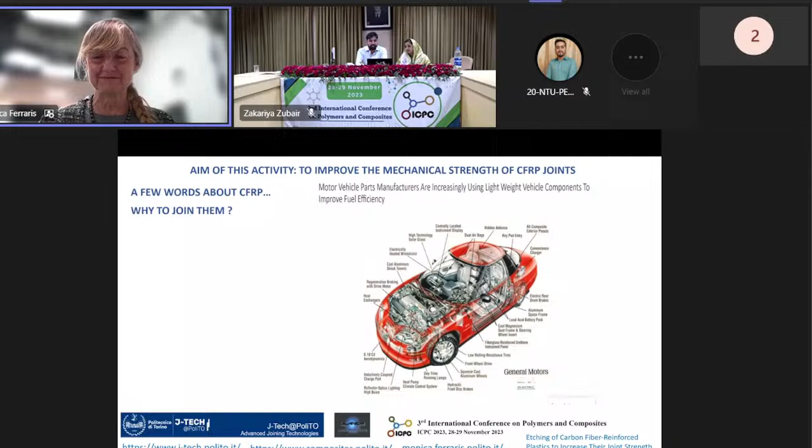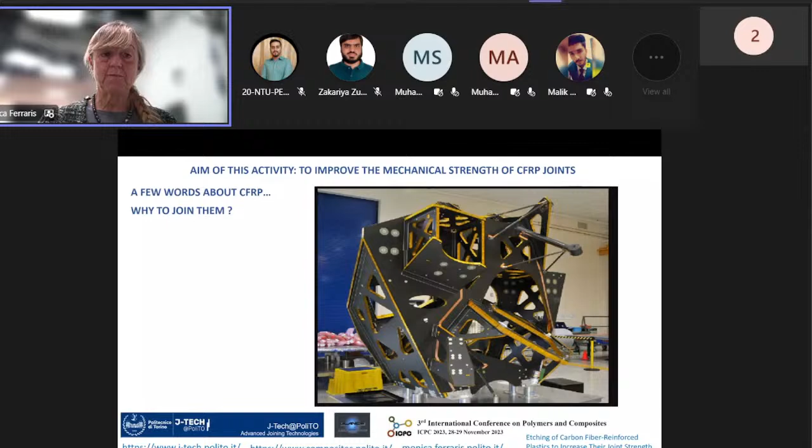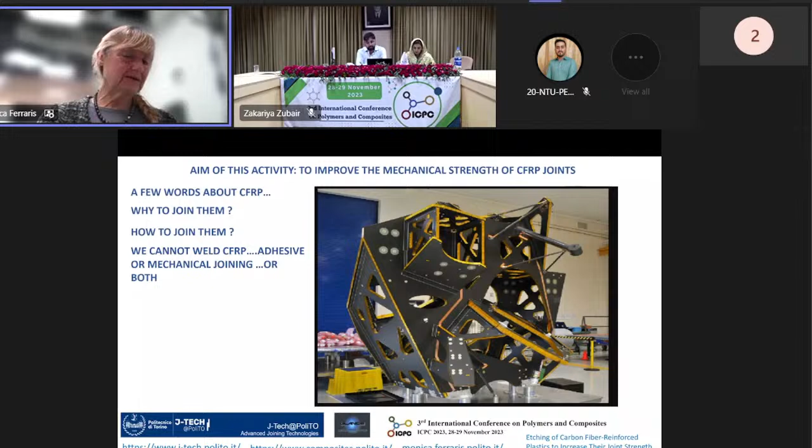So how to join them? For sure, we cannot build monolithically. So we have to take CFRP, put them together to themselves or to other materials, metals, and then we have to join them. Since we cannot weld CFRP, adhesive or mechanical joints or both are the most interesting options. You can see there are some adhesive joints, maybe reinforced by an additional structure, or a traditional metallic mechanical joint. But where is the problem?

Weight increase and cost. So in order to avoid both of them and have a reliable joining strength, we patented a method to etch a thin layer of the matrix without affecting the fibers, in order to have some sort of a composite joint.

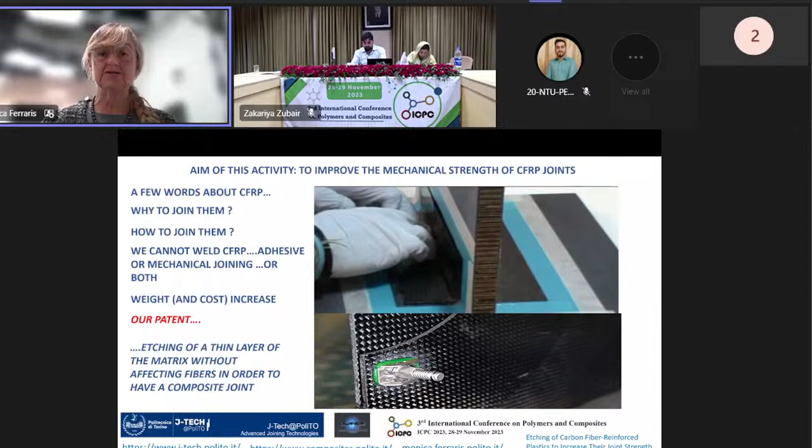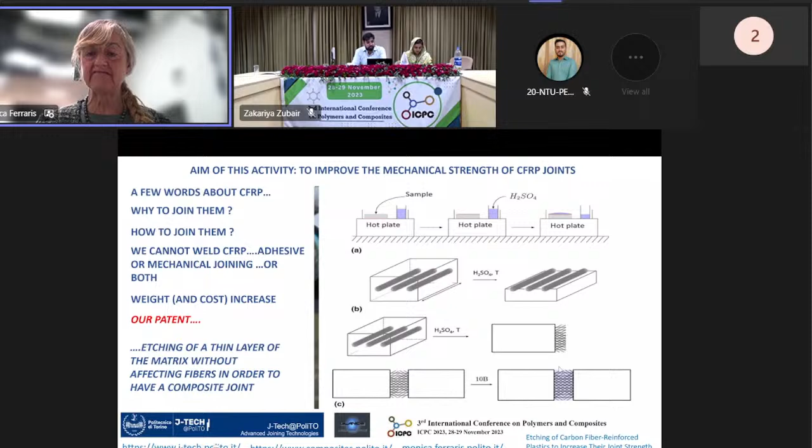So I'll show you a very quick drawing about how we work. This is our sample, the CFRP. Then there is an acidic etching, for instance by sulfuric acid. The aim is to expose fibers without destroying them. If you do that on the other side, you can expose fibers on both sides, and then you can infiltrate your adhesive, and you end up with a composite joint.

This is the aim. This is the lap shear strength of two CFRP jointed together, non-etched, and then with different kinds of etching. This process is very sensitive to temperature and time of etching, of course, but if it works, you can double the lap shear strength, so you can go quite high in numbers.

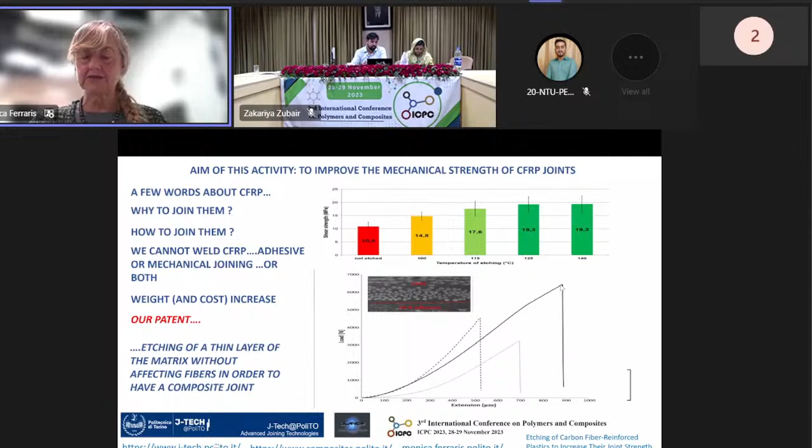And why that? Because you have the CFRP and then the adhesive, but actually you have fibers, and the adhesive infiltrates the fibers, so you have sort of a composite joint. And if you give a look here, the shape of this curve is a brittle fracture. You have a sort of composite failure also for the joint, so it works. It worked, but when you change composite, the etching process is critical.

By the way, all these results are unpublished, and are the subject of another PhD study from Alessandro Benelli, a colleague of mine at Politecnico di Torino, who continued Kashif's activity.

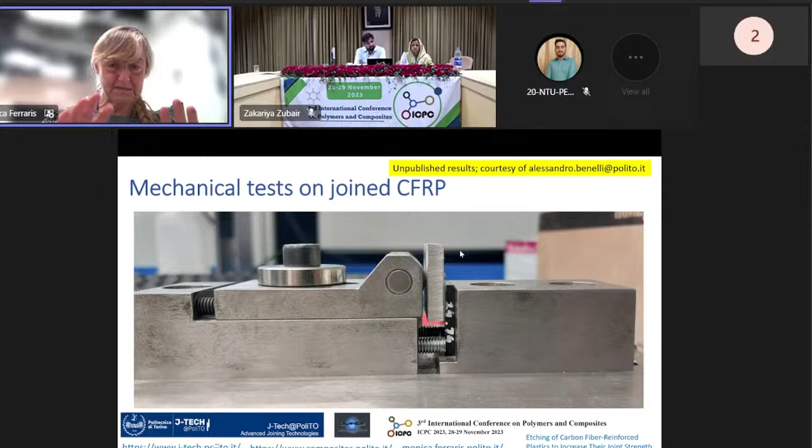Again, this is not pure shear. We are perfectly aware that there are some stress concentrations here and there, but it is at least one way, a simple way to test the behavior of many different etchings. We are now thinking about moving to tensile, but even with tensile, we have some issues with bending. So at the moment, we stay on lap shear, offset lap shear in compression.

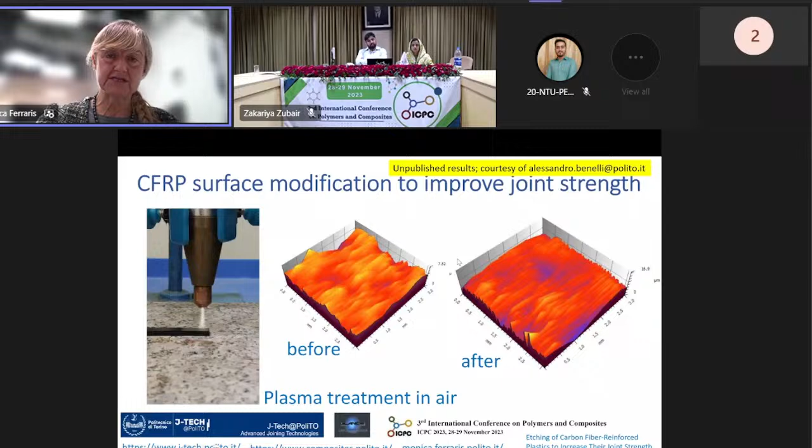So another activity we are doing in parallel is surface modification of CFRP in order to improve the joint strength. Not just acidic etching, but we try to work with plasma treatment in air right now, plus in the future with different gases. And, well, as you know pretty well, it is a way to clean the surface, not just to clean, but a way to activate the surface and to improve the joint strength. We have just started this activity on that.

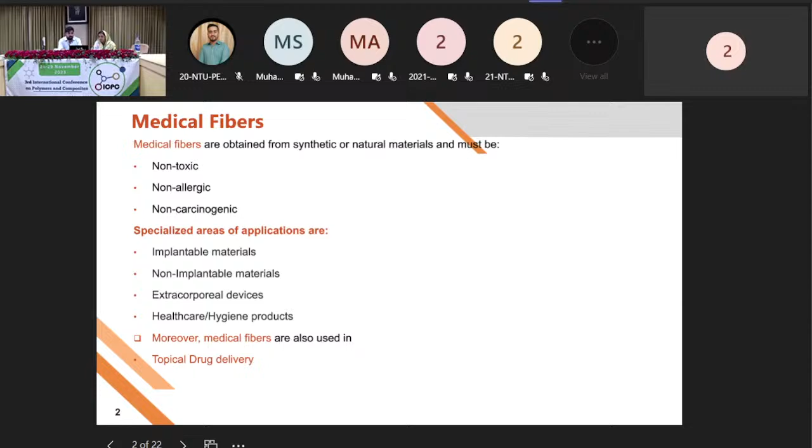So regarding the medical fibers, their specialized applications include implantable materials, non-implantable materials, extracorporeal devices, healthcare and hygiene products. In addition, they are also used in topical drug delivery systems, which is a medication device used to administer drug to the body through the skin. In this process, we use different sorts of formulations, which include cream, gel, ointment, paste, lotion, powder, etc., which we are actually using in our daily life.

Apart from that, there are some other forms like fabric form, which can be a non-woven structure or a proper fabric structure which has drug incorporated on such carriers, and the drug can be penetrated through the skin from these reservoirs.

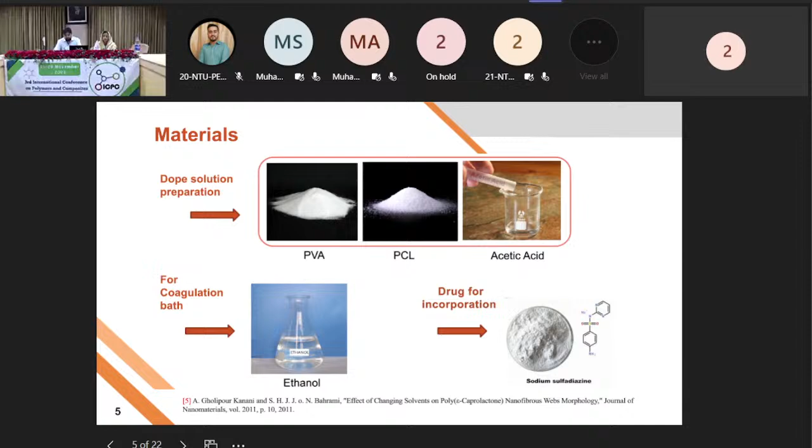Concentrations of different types of materials in this project, which are polyvinyl alcohol and polycaprolactone. For polyvinyl alcohol, we have used 5 to 20 weight per volume percent. For polycaprolactone, we have used 6 to 12 weight per volume percent, and all of these different ratios are developed so that we can analyze the effect of different concentrations of each material. Later on, we will achieve the best possible blend ratio, which will provide the required properties for medical applications.

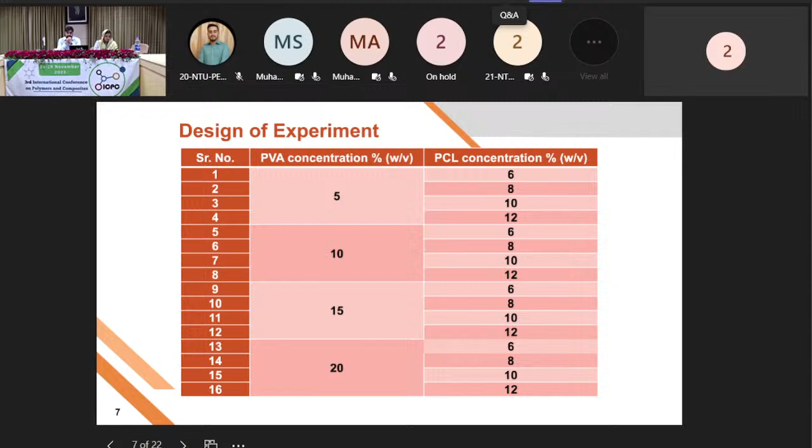Sodium sulfadiazine as a model drug in the optimized blend ratio. The sodium sulfadiazine used is in the range of 1 to 2 weight percent in the materials. Characterization includes rheology, linear density, FTIR, and SEM analysis. For mechanical characterization, we have used tensile and elongation properties. We also tested comfort and suitability characterization through liquid absorption, swelling behavior, and the degradation test. Finally, the biomedical characterization is done with respect to antimicrobial efficacy and drug release profile tests.

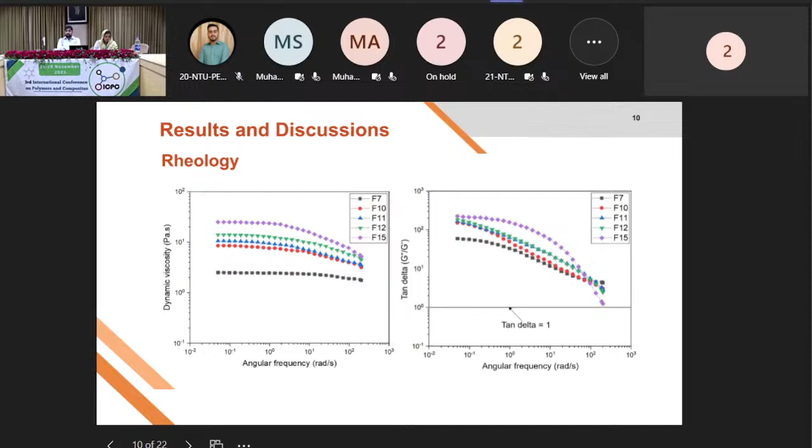Regarding the rheology, it is observed that with the increase in polyvinyl alcohol levels, the viscosity of the material increases. It is also observed that with the increase in shear rate, the overall viscosity decreases. Polyvinyl alcohol concentrations, the material linear density increases, which explains that the material becomes more viscous, and because of the higher viscosity, thicker fiber material is achieved.

Because thicker material is achieved, the tenacity of such materials also lies a little lower, because the stretching and solidification of the polymeric chains are not so linear. In this regard, the tenacity of the material is impacted, and we can state that with the increase in polyvinyl alcohol levels, the tenacity reduces. With the elongation, the polymeric chains do not find a good time to align themselves, and hence such materials do not show good tenacity and elongation behaviors.

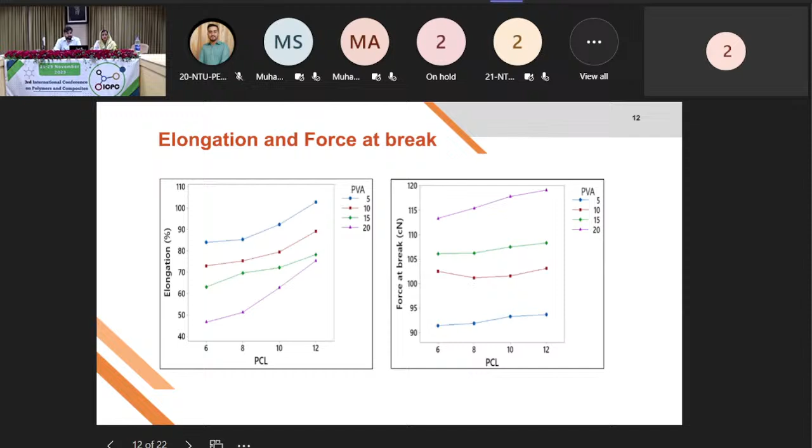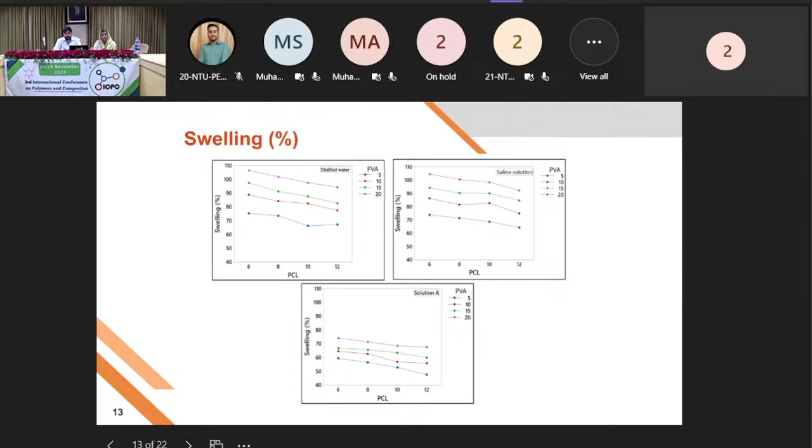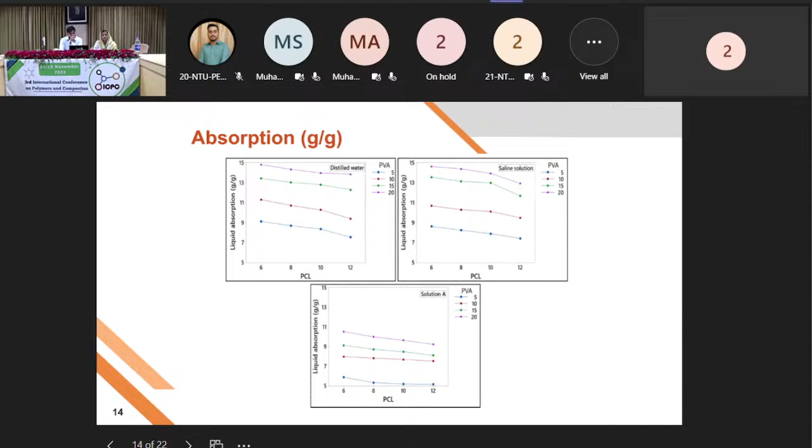Observed in three different solutions, which are distilled water, saline solution, and solution A. The results show that with the increase in polyvinyl alcohol levels, the swelling percentage increases in all solutions. Regarding the PCL, it is observed that swelling reduces with the increase in polycaprolactone levels. Absorption gram per gram, or absorption percentages in three different solutions: distilled water, saline, and solution A. It is observed that with the increase in polyvinyl alcohol levels, the liquid absorption weight increases, which is exactly the same as the swelling behavior of the material.

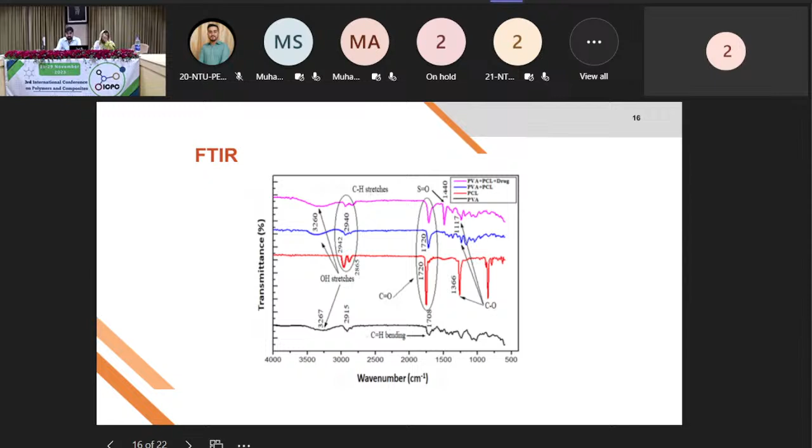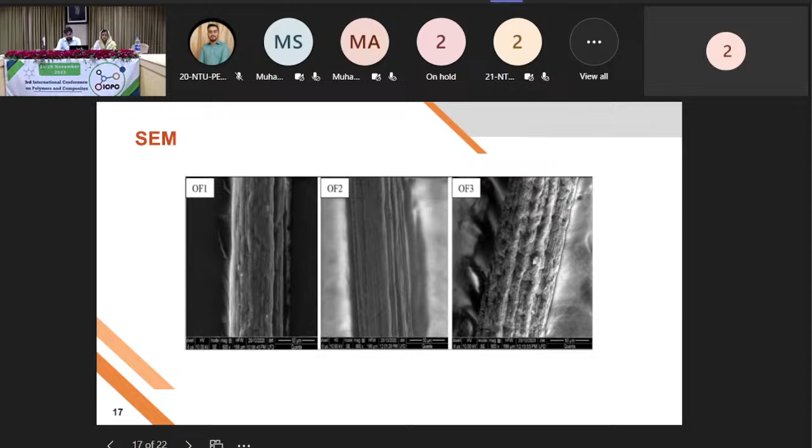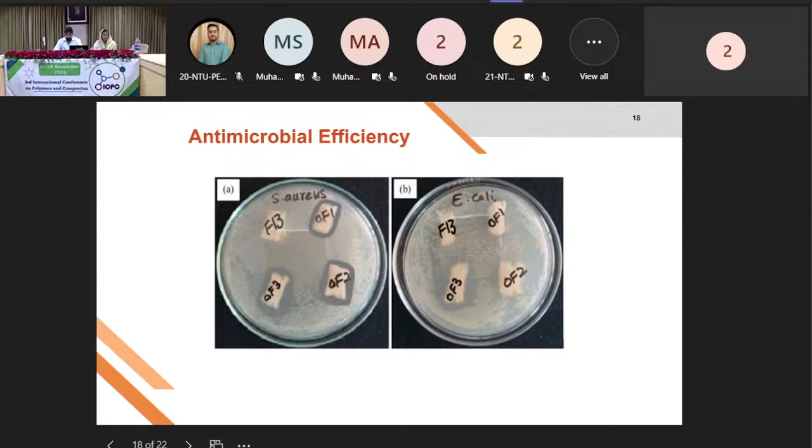Polyvinyl alcohol polycaprolactone co-extruded fibers. The drug can be incorporated and released from the developed co-extruded fiber. Developed fiber with drug exhibits excellent tensile properties, swelling properties, adequate liquid absorption, degradation percentage, and good antimicrobial activity with controlled drug release.

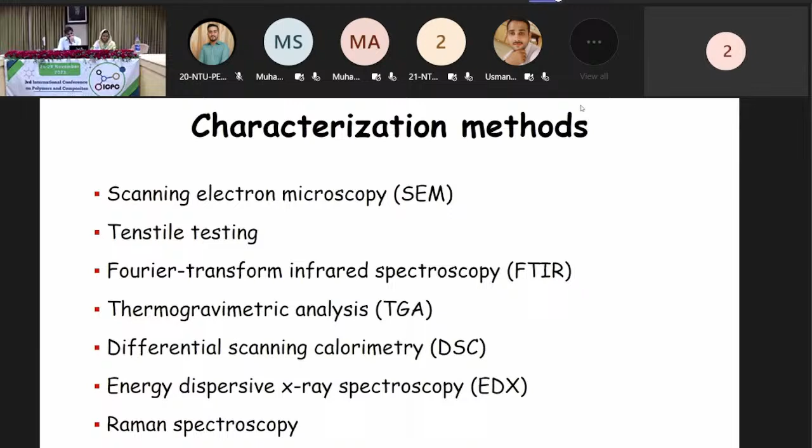So the objective of the study is a comparison of 5 distinct natural fibers, including jute, hemp, linen, sisal, and banana fibers as composite reinforcement. The characterization methods applied in this study include scanning electron microscopy, tensile testing, Fourier transform infrared spectroscopy, thermogravimetric analysis, differential scanning calorimetry, energy dispersive X-ray spectroscopy, and Raman spectroscopy.

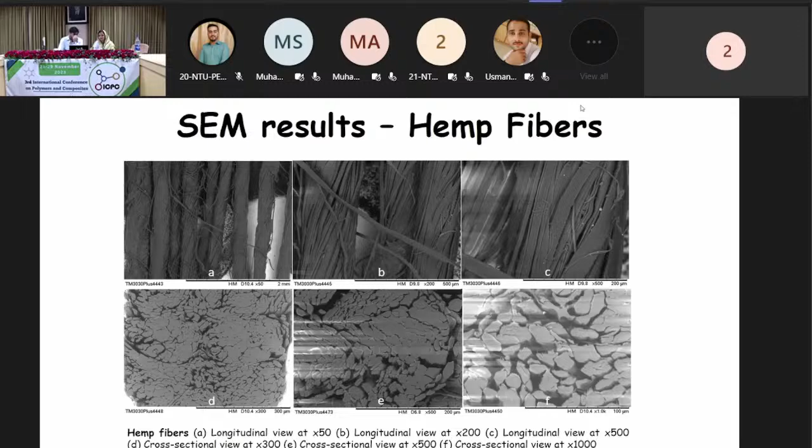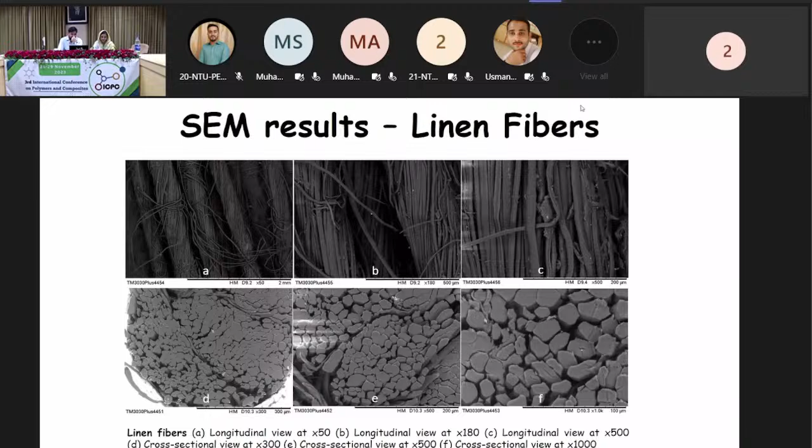Regarding hemp fibers with the same longitudinal and cross-sectional magnifications, hemp fibers are rod-like, and they have some notches on their surface also. Linen fibers are also rod-like. They have some notches on their surface. The smooth surface of linen fiber gives it more softness than other natural fibers, and this makes it popular in clothing fabrics, particularly for women.

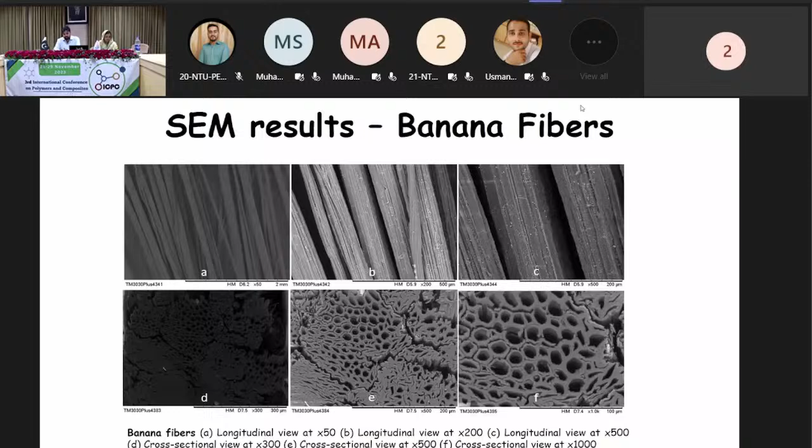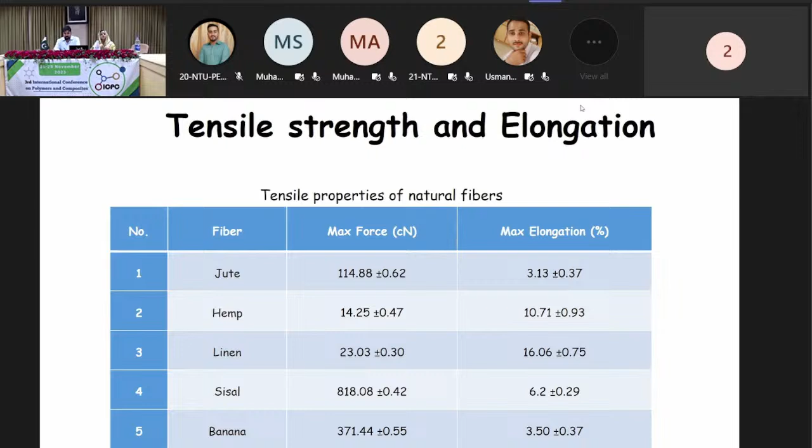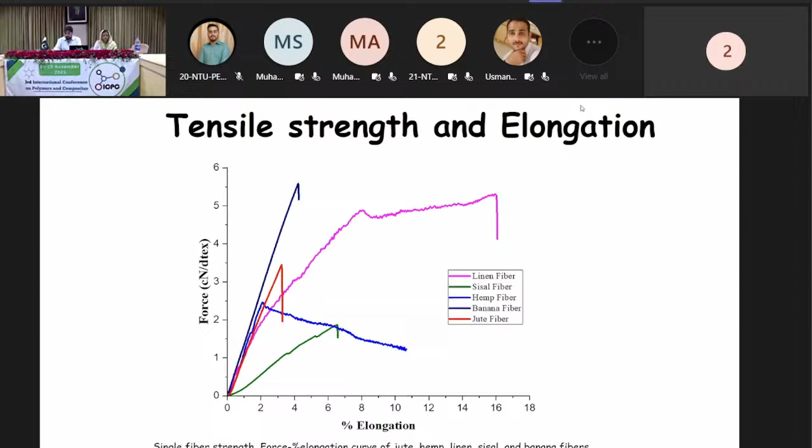Sisal fiber has the highest breaking strength. Linen fiber has the greatest elongation. Sisal fiber has a larger diameter or thickness than the other fibers, as demonstrated in the SEM examination, and as a result, it has a higher tensile strength. Hemp fiber has the smallest thickness and diameter among the fibers. It also has the worst tensile strength. Linen fiber has a slightly higher thickness than hemp fiber. It exhibits slightly better tensile strength.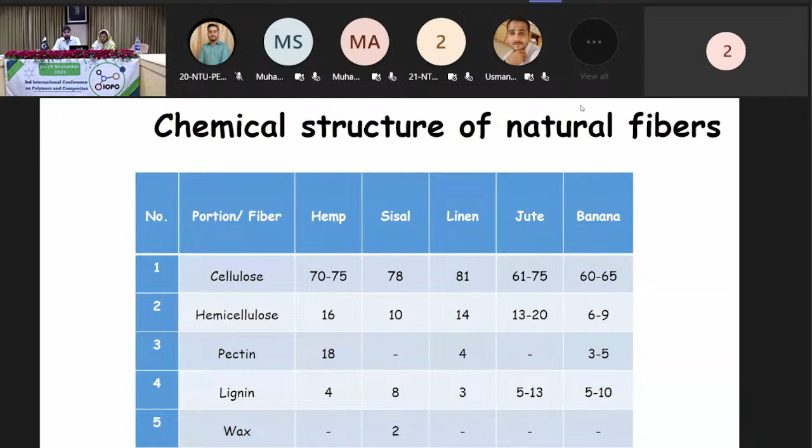The chemical structure of natural fibers is brought in this table. They all contain cellulose, hemicellulose, pectin, lignin, wax, as you can see here. Regarding the FTIR results, the OH stretching vibration is related to the broad peak at 3,000 to 3,600 cm⁻¹. The asymmetric and symmetric CH vibrations from the CH2 group of cellulose and hemicellulose respectively are represented by the peaks at about 2,900 and 2,850.

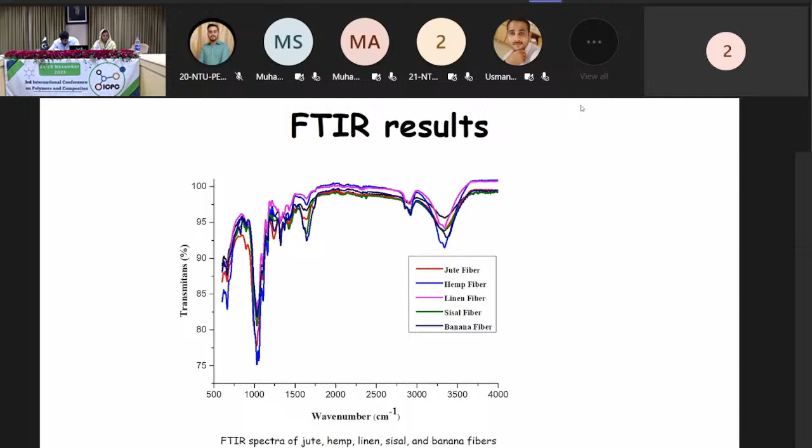The carbonyl C=O bond stretching vibration of carboxylic acid in lignin or ester group in hemicellulose causes the peak at 1639 to appear. CH2 symmetric bending in lignin, cellulose, and hemicellulose, and CH symmetric deformation of cellulose and hemicellulose are related to the peaks near 1427 and 1369 respectively.

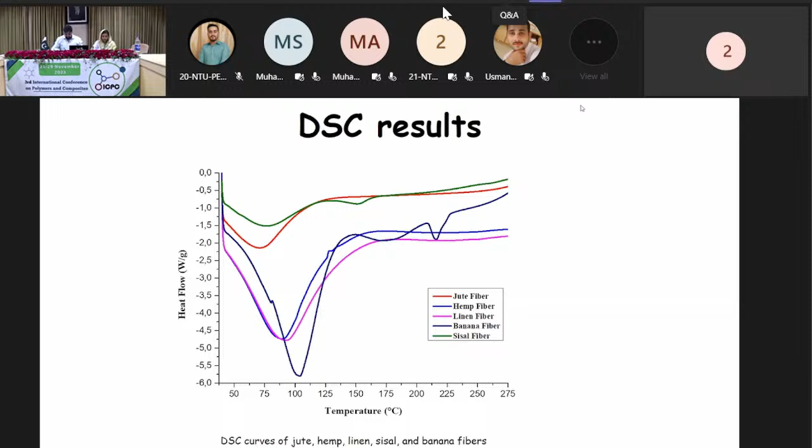The DSC test actually measures the enthalpy change brought on by variations in the sample's chemical and physical properties with respect to temperature. The evaporation of water from the fiber structure results in a large endothermic peak that emerges between 30 and 135 degrees centigrade. There is a large endothermic peak because water molecules have such a wide range of binding energies to the cellulose backbone.

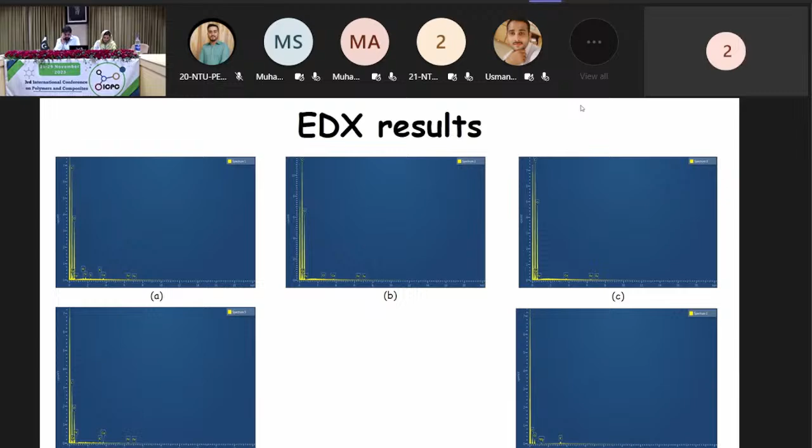EDX is a technique that reveals an element's composition by analyzing its different constituents. As you know, carbon and oxygen were found in all of the natural fibers. The results revealed that all 5 natural fibers include calcium, iron, carbon, and oxygen. Regarding the Raman analysis result, the major peak at 1096 is indicative of the CO stretching mode of cellulose, but the peak at 380 is only associated with crystalline cellulose and is not present in amorphous cellulose.

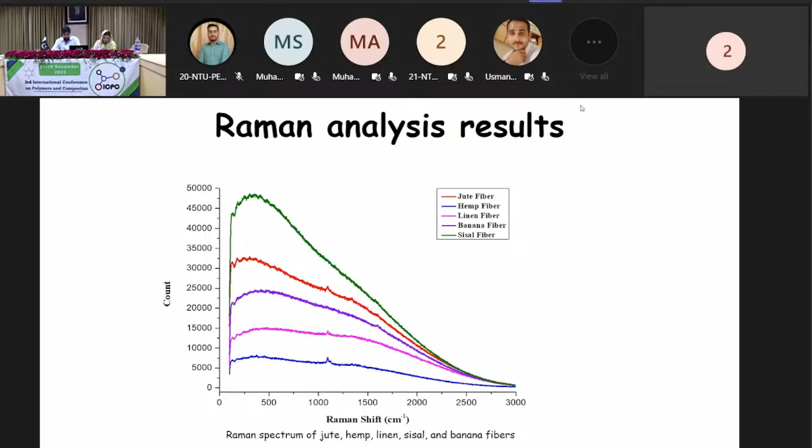In conclusion, I have to say that the sustainability of natural fiber-based composite materials has led to an upsurge in their application in various manufacturing sectors. Advantages of natural fiber composites include lightweight, low energy production, and carbon dioxide sequestration. Replacement of fiberglass with natural fiber removes the concern about the potential of lung disease caused by the former and is a move toward sustainable development.

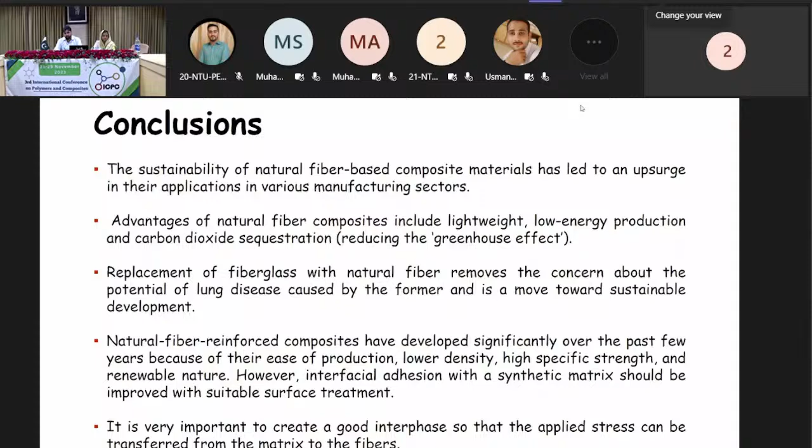Natural fiber reinforced composites have developed significantly over the past few years because of their ease of production, lower density, high specific strength, and renewable nature. However, interfacial adhesion with a synthetic matrix should be improved with suitable surface treatment. It is very important to create a good interphase so that the applied stress can be transferred from the matrix to the fibers.

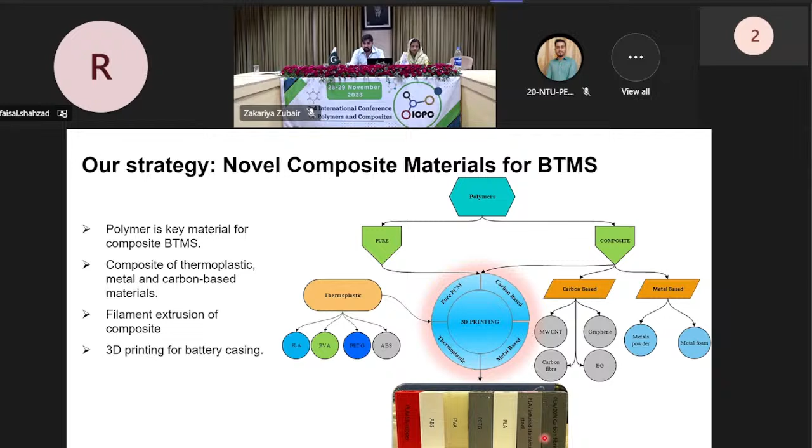So, optimizing of design and battery thermal management. In our work on 3D printing, first we designed the casing of the battery and then we printed that design. But before that, we used a 3D filament maker. First, we make the filament. In the next slide, I will show you how we prepare the materials.

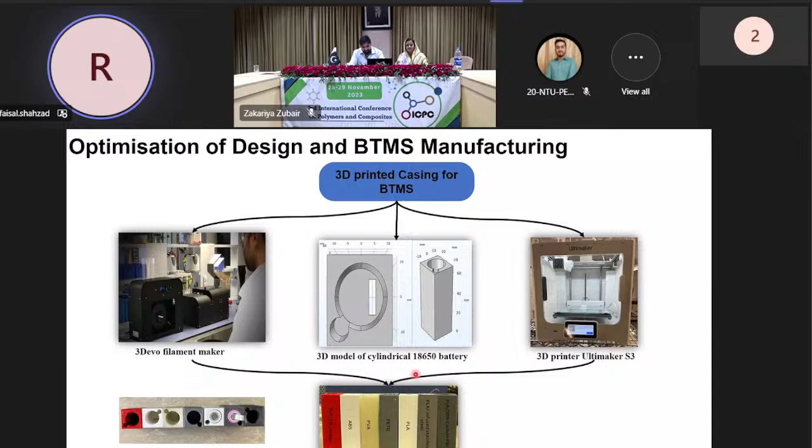But in our case, first we develop the design of the battery pack, then we 3D print, and then we test that material at different charging and discharging rates. So this is our material design through filament extrusion. First, we shred the materials, so we can easily use any recycled PLA, PVA, PETG, and any type, and then we dry it, then we melt it, and we use 3D extrusion, and then we spool it, and then we print it. So you can easily see the process of making the filaments for the battery thermal management systems.

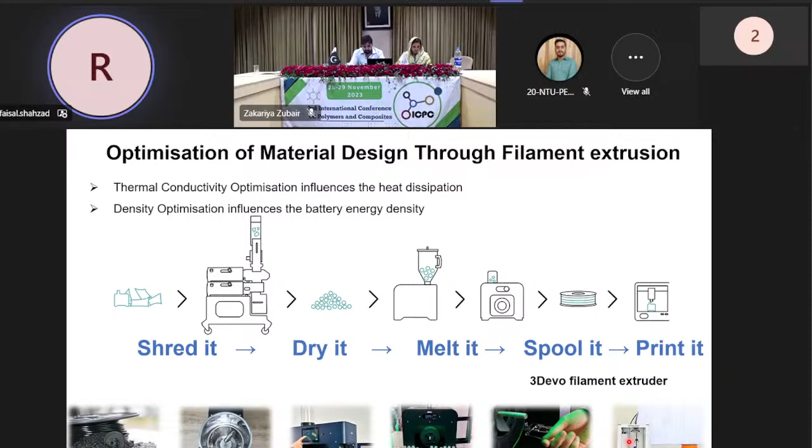Then the next stage is the printing. We have optimized it, because ABS, PETG, PVA, and PLA have a fixed temperature that we can print at. But we have a mix of 80% stainless steel with 20% PLA, and 20% steel with 80% PLA. So we have optimized at what temperature we can print these filaments. If we print at the normal temperature, we can't make it, because the printing will stop and it will be more porous compared to normal printing. So you can see that this is the Ultimaker, printing the battery pack.

So after the material preparation, we start the testing, because for the battery thermal management system we need to know how it works with the battery conditions. So we have environmental chambers. We fixed the temperature at 25 Celsius, and then we have a battery tester to test the battery at different charging and discharging rates. So this is all the setup for our testing, validation, and experiments.

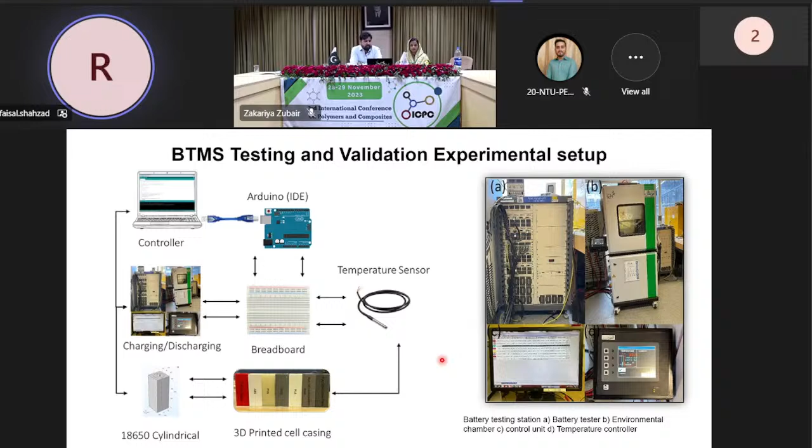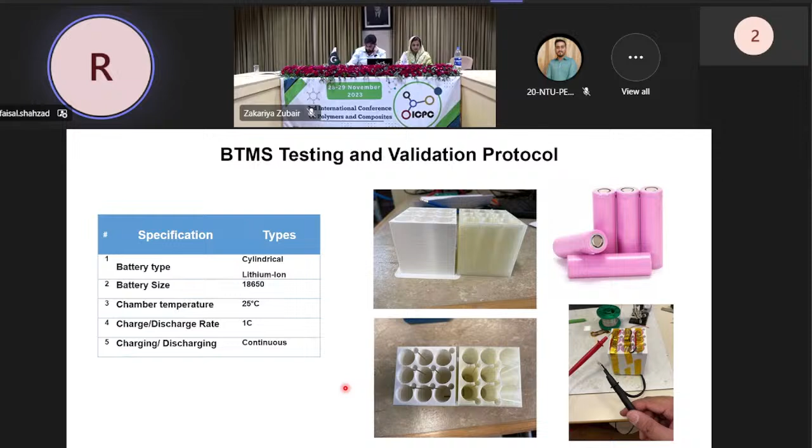So, battery thermal testing and validation. Mostly the EV industry, especially in the UK, is using cylindrical batteries. So lithium-ion batteries, and we have tested our material on the 18650 cylindrical battery, and the chamber temperature is fixed at 25 Celsius. The charging rate is 1C, so the battery will charge and discharge at 1C. And it's continuous charging, because we want to know the impact of continuous charging and discharging of the battery, and how the material will behave with the temperature of the batteries. So you can see we have a printed battery pack, and we have made all this setup at Northumbria University. I will quickly go through the results.

Then we measured the thermal conductivity and density of the material, because in a battery thermal management system these two things are very important. First is the thermal conductivity, and then the second is the density. So we are trying to find a material which has low density and high thermal conductivity, because most metal materials have really good conductivity, but because of their weight, let's say copper has very high thermal conductivity, but we can't use it for battery thermal management systems in different filaments, because it will increase the weight of the battery pack.

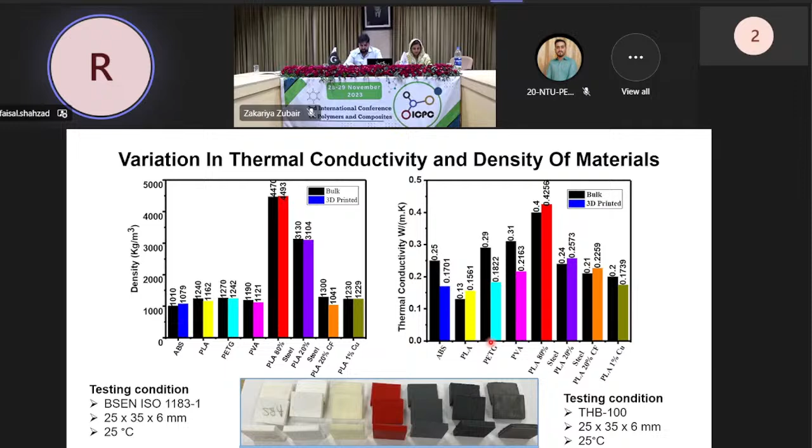So you can see the samples. We have not put the whole battery pack. So we just take 25, 35 by 6 mm samples. We have printed the samples, and then we have measured the density and the thermal conductivity of the materials. So you can see we have the best material. We have the PVA and the carbon fiber. So you can see the PVA density, and then the PVA thermal conductivity.

So here we have tested our material at 1C charge and discharging rate of the battery. We continuously charge and discharge the battery for more than 140 hours. So we have tested, and we have plotted the graph from 0 to 140 hours with the different PLA, ABS, PETG, and then the PLA. I will show you in the next graph, because it's very tightly plotted. I just want to show you that we have done from 0 to 140 hours to compare the result of different materials.

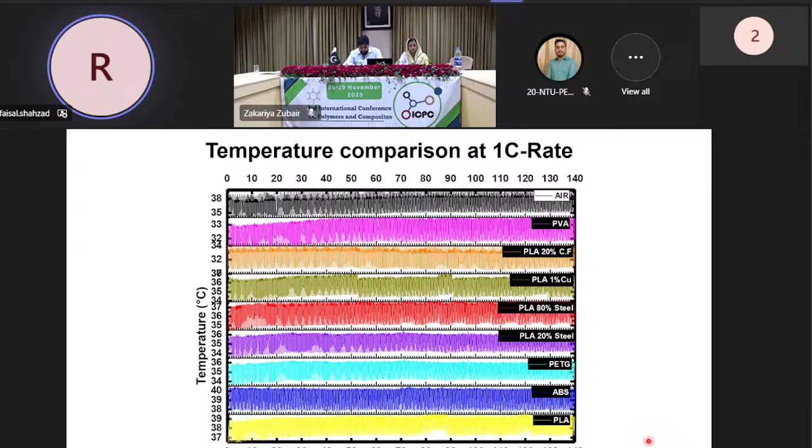So here you can easily see that we have different materials. First, I have plotted the first 5 hours, then I have plotted the last 136 to 140 hours. So from our conclusion, PLA plus 20% carbon fibers. You can see in the first 1 to 5 hours, and then after it's almost maintained, because it's continuously charging and discharging, the material is not decomposing, and it's showing really good, the temperature is not increasing.

But if you see in the case of PLA and 80% steel, the temperature is increasing. And if we go for the PVA also, it's a bit increasing, but it has really good efficiency as compared to other materials.

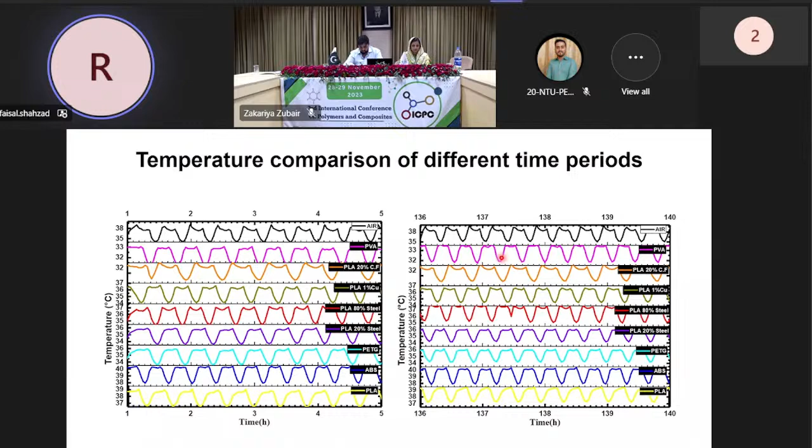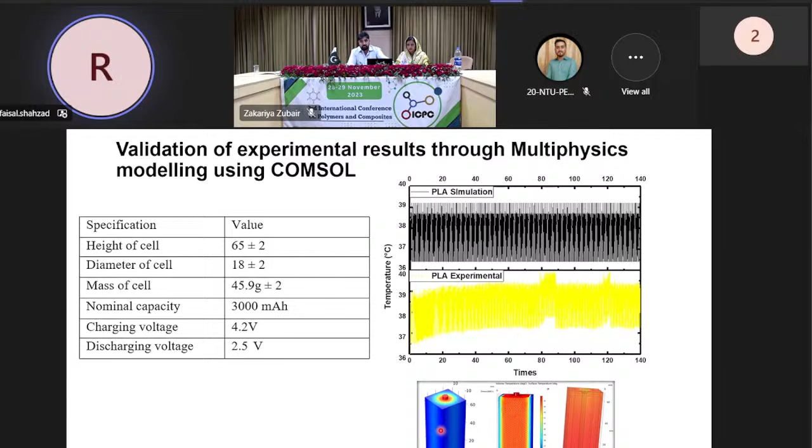So we have done all the data from 0 to 140 hours, and you can see the simulations, the CFD of the battery thermal. It's a single cell, so we have done the single cell simulations. And then recently we have done some battery pack simulation, so you can see the video of the simulation for the whole battery pack. So you can easily see that during charging and discharging, temperature is increasing and decreasing.

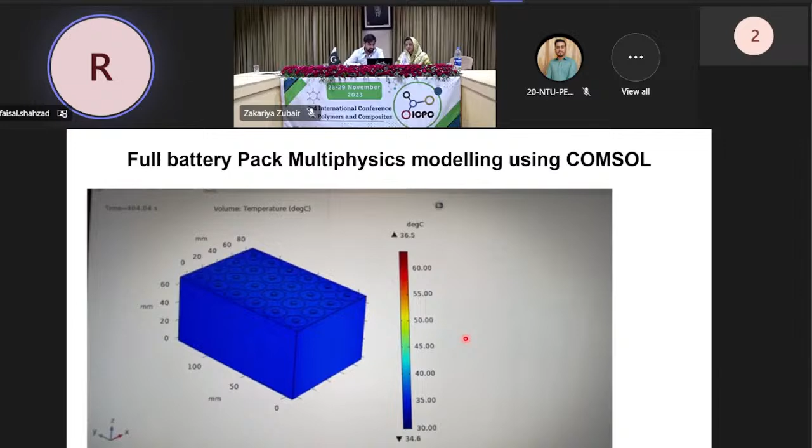And the future work, so we are planning that for the pure PCM, we are trying to add some paraffin waxes and salts and different inorganic bio-based PCMs. And we are trying to optimize, because if we put the pure PCM, it will leak out from the battery pack, because the temperature sometimes during fast charging goes more than 120 Celsius. So the PCM will leak out.

So we are trying to optimize the PCM, what kind of PCM we can mix in that material. And then we have carbon. So we are also trying expanded graphite. We have already optimized carbon fiber, which has really good results compared to carbon nanotubes and graphene. Metal, we are also using some metals, and we also have a plan to test some more metals in these battery thermal management systems.

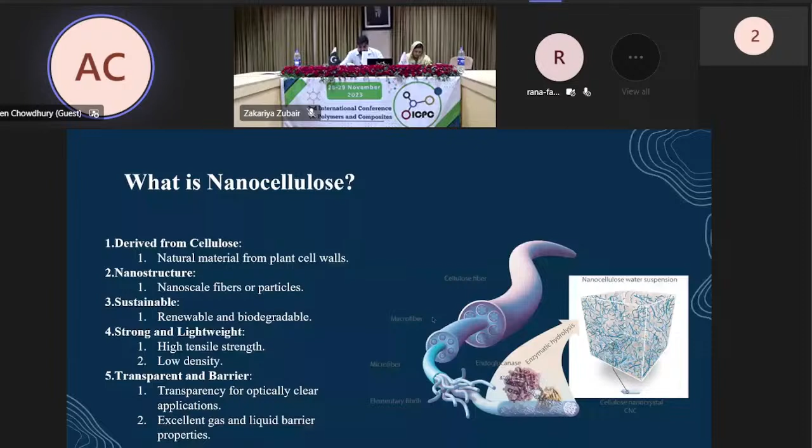Moving on to the next part, applications of nanocellulose, or where do we use nanocellulose? Nanocellulose has a variety of applications, among which a very famous one is textiles. Nanocellulose can be used in textile industries, and some industries use it to capture carbon dioxide to reduce pollution in the air. We use nanocellulose to produce food packaging materials like packets, coffee cups, stuff like that. And we can also use nanocellulose in wastewater treatment.

All right, since my topic is mainly focusing on the use of nanocellulose in the paper industry, I would like to focus on that now. I'm going to be talking about the role of nanocellulose in the paper industry. Nanocellulose has gained importance in the paper industry due to its unique properties, such as very high strength, flexibility, and sustainability. All industries want these three properties in a product they're making, so these three properties make nanocellulose one of the best choices for the paper industries as well.